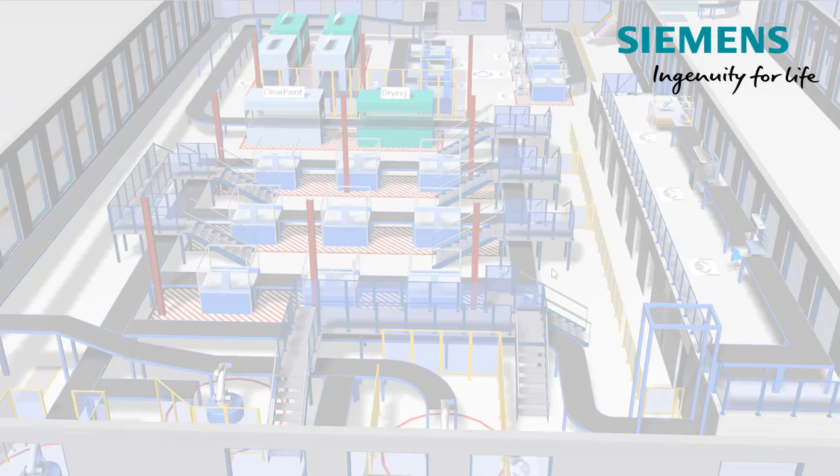This video demonstrates how to model with workers who do their job at a workplace which is attached to a station. To do so, we'll create a production line.

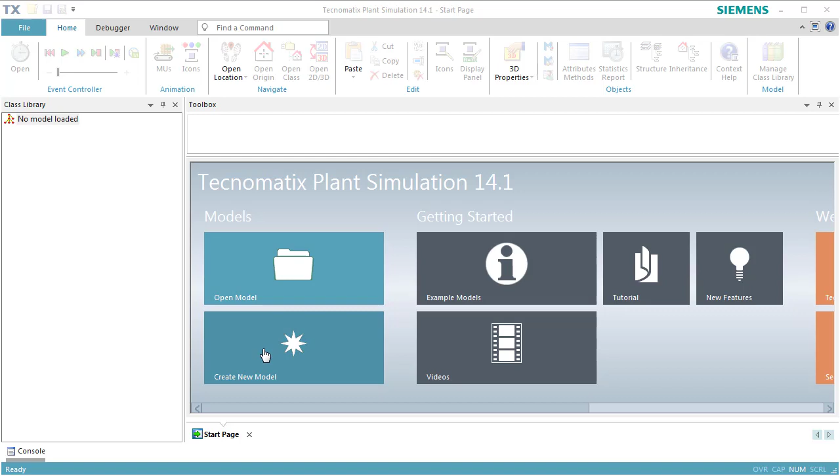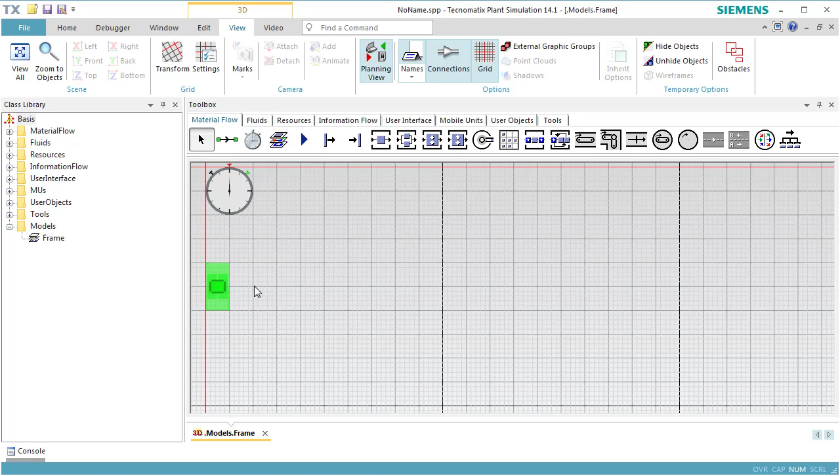With a source, 4 stations, and a drain.

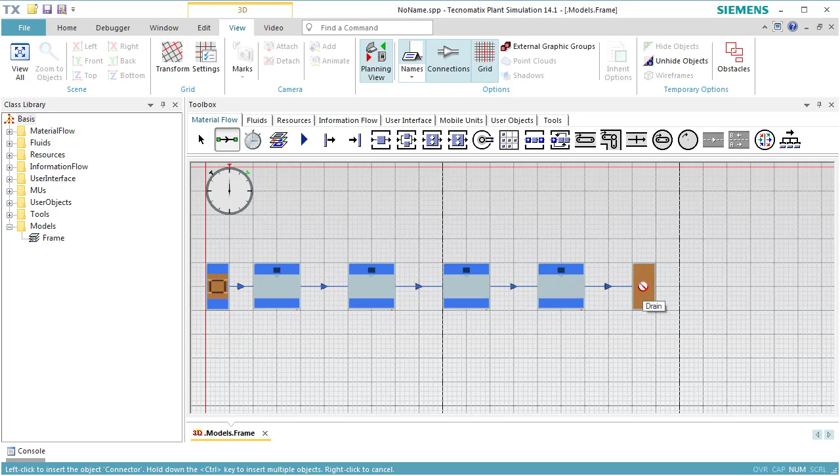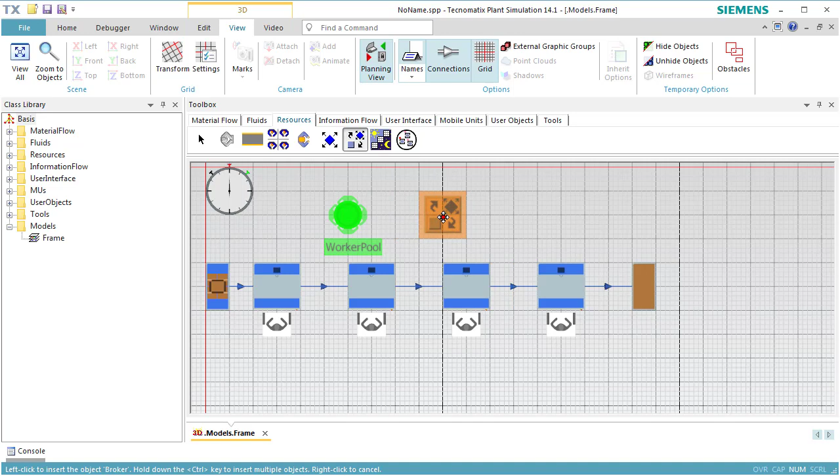Then we click the toolbar Resources and insert the objects which the worker requires to do his job. First, we insert the workplaces. These are associated with the individual stations on which he works. Then we insert a worker pool, from which he walks to the workplaces and where he stays when he's not working. Finally, we insert the broker, who assigns the services which the stations request and which the worker executes.

Now we can switch off Planning View. When we run the simulation, we'll notice that the worker does not work yet. This is because we have not told the stations to use services and where to request those services.

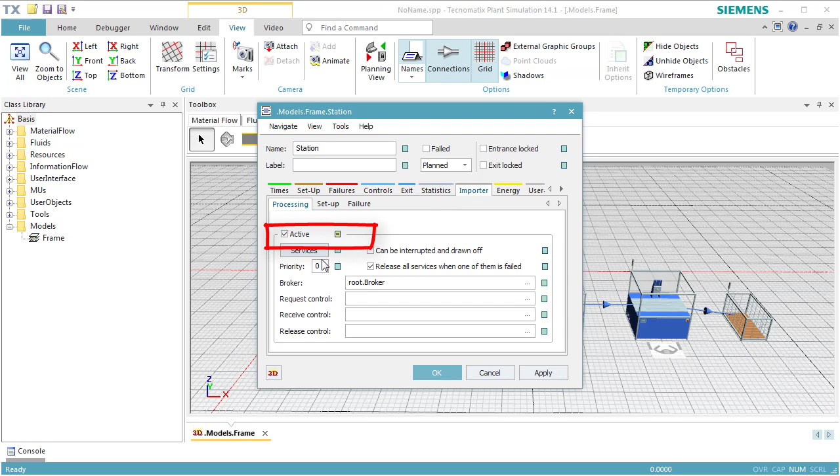We open the station and click the tab Importer. We select Active to activate the use of services. We repeat this for Station 1, Station 2, and Station 3.

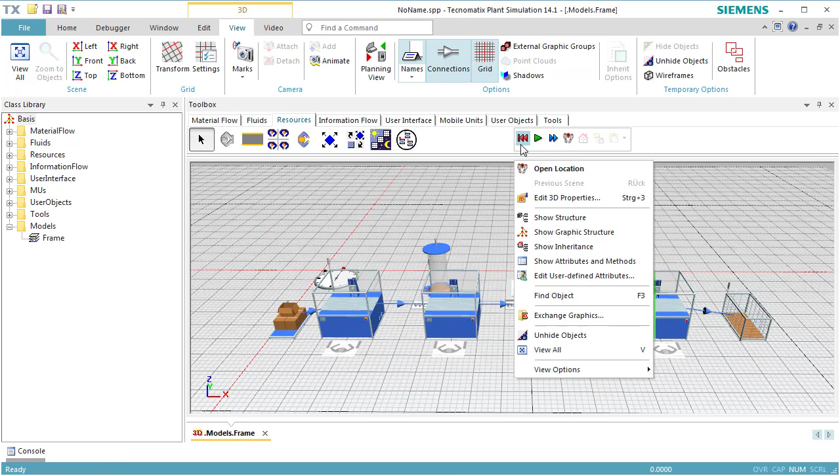When we click Reset and Start, we see that the worker works at the workplaces attached to the stations. To better follow the movement of the worker, we reduce the simulation speed.

For our production line, 1 worker doing the job is not enough. Therefore, we need to increase the number of workers.

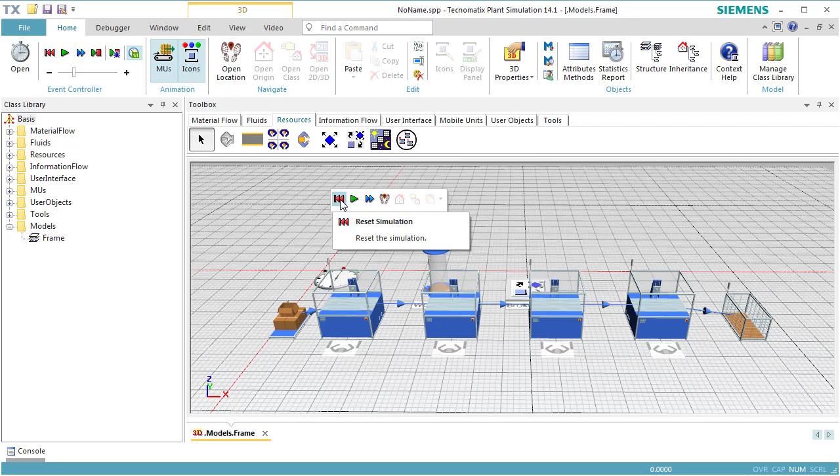Double-click the Worker Pool to open its dialog. On the tab Attributes, switch off inheritance of the creation table by clicking the green button next to the button Creation Table. Now click the button Creation Table to open the Worker Creation Table.

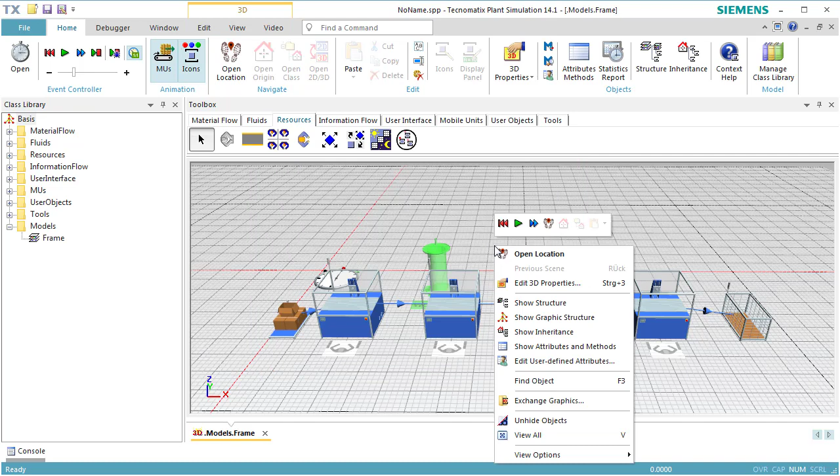Enter 2 into the column Amount to create 2 workers. Click OK to close the window of the table, and click OK to close the dialog of the worker pool.

Reset and start the simulation. Now, 2 workers are created. Each of the 2 workers is doing every job, meaning that both workers are working at all of the stations.

In the next step, we want to change the model so that only 1 worker works at Station and at Station 1, and the other worker only works at Station 2 and Station 3. To achieve this, we have to define services for the worker and services which are requested by the stations.

Double-click the station to open its dialog. Select the tab Importer. Before we can change the services requested by the station, we have to switch off inheritance of the services by clicking the green button next to the button Services. Click Services to open the table of the services.

By default, the standard service is requested with the amount of 1. This means to process a part, the service standard service with the amount of 1 is required. If this service is not available, the part cannot be processed.

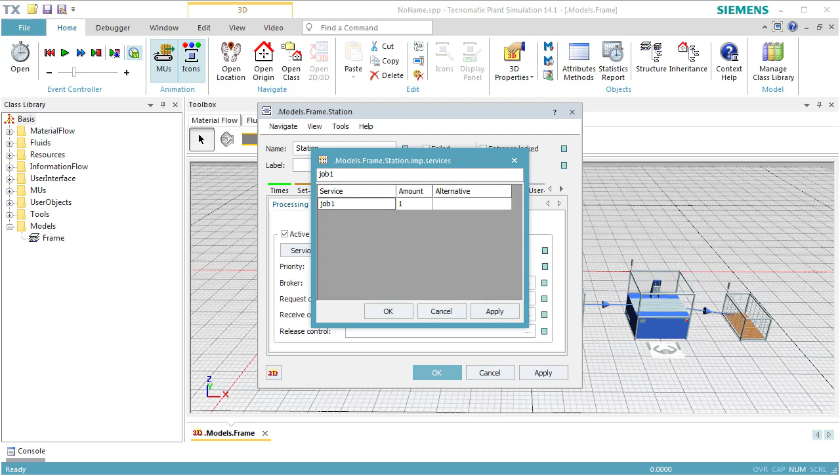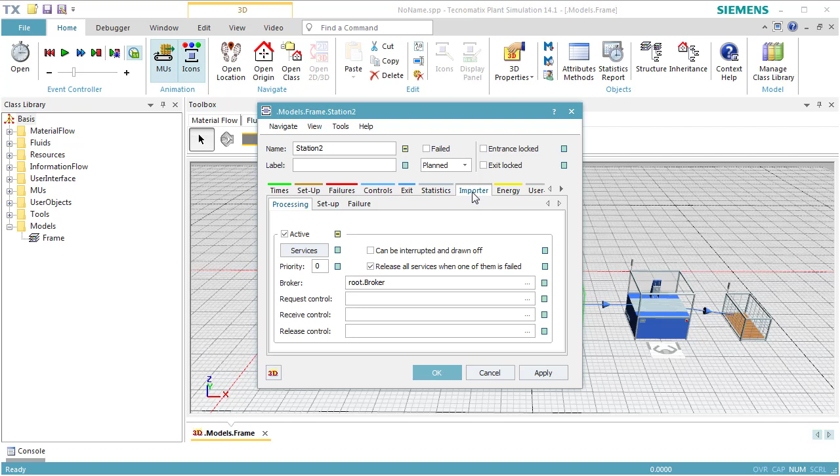Enter Job 1 instead of Standard Service. Repeat this for Station 1. For Station 2 and Station 3, we define the service Job 2.

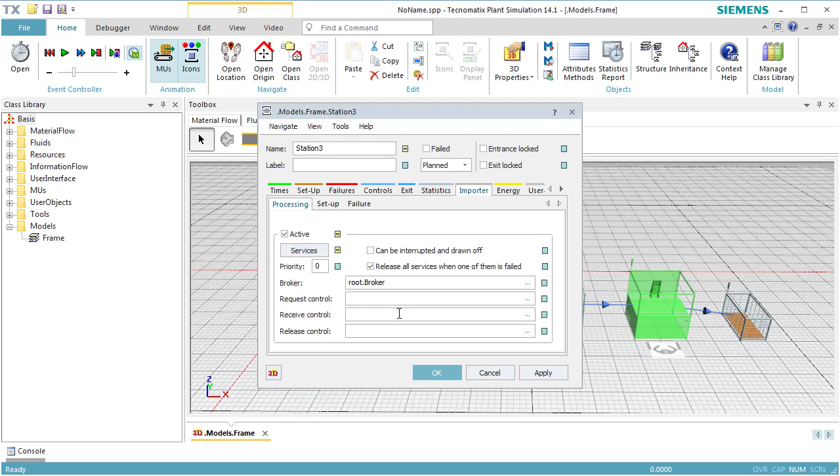Now we also need a worker who can do Job 1 and one who can do Job 2. Double-click the worker pool to open its dialog. Click the button Creation Table to open the Worker Creation Table.

Enter 1 into the column Amount and Job 1 into the column Additional Services. Press Return to insert a new row into the table. Drag the worker from the tab Resources of the toolbox and drop it on row 2, column 1.

This defines the class object of the worker, which will be used to create the worker during the simulation. Enter the amount of 1 and Job 2 as Additional Service.

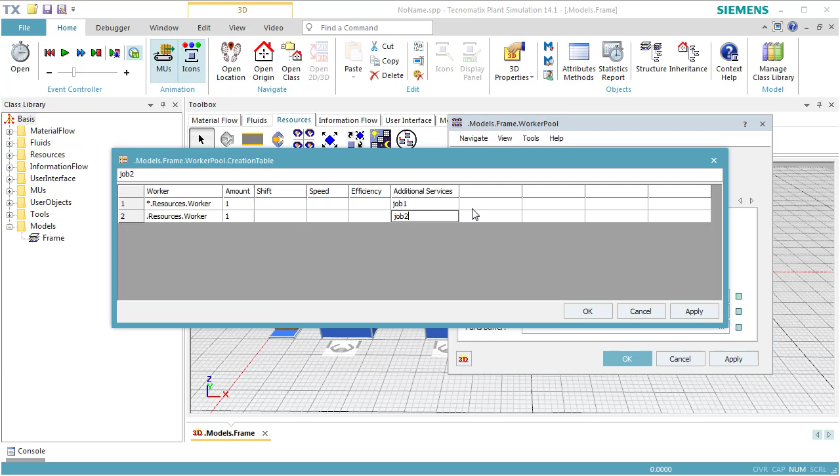Make sure you're using the same spelling of Job 1 and Job 2 in the service table of the importers and in the Worker Creation Table. Otherwise, the simulation model will not run.

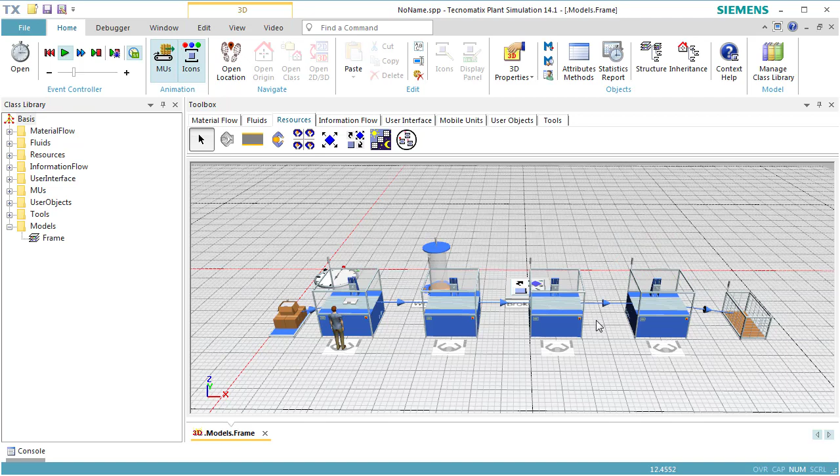Click OK to close the creation table and click OK to close the dialog window of the worker pool. Reset and start the simulation. Now, one worker works at Station and Station 1, and the other worker serves Station 2 and Station 3.

This finishes our video about modeling with workers.